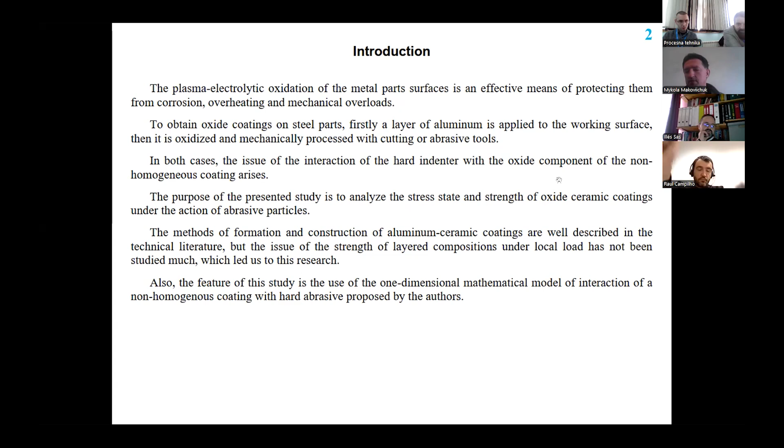So let us consider a rigid structure element foundation on which a thin coating is applied, consisting of an outer hard, functionally gradient part or layer and a relatively soft, non-homogeneous substrate, as shown in Figure 1. The mechanical contact between layers is considered ideal.

From a mechanical point of view, the hard outer layer is considered a non-uniform elastic plate, which works in tension and bending, and the soft inner layer is subject to the Winkler hypothesis of proportionality of stresses and elastic displacement.

To simulate contact with a sliding abrasive particle, the structure is loaded by a vertical force P and a horizontal friction force Fp, uniformly distributed along the z-axis deep in the drawing. In the presented model, large values of friction coefficient F correspond to sliding of fixed abrasive in the micro-cutting process, and small values of friction coefficient F correspond to sliding of unfixed abrasive with possible rolling.

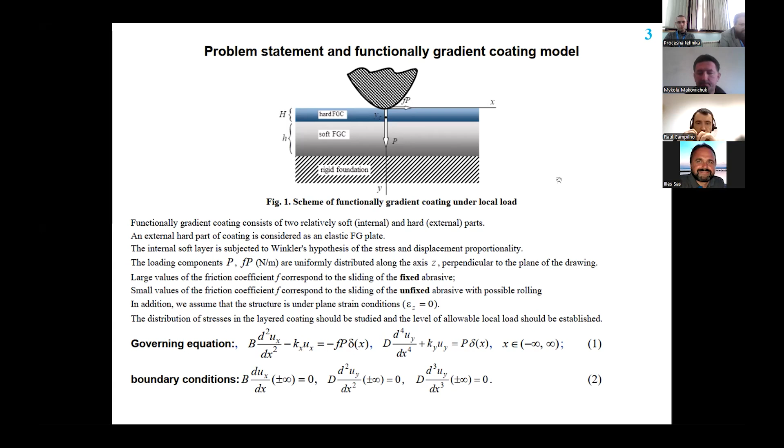We have the boundary value problem 1 and 2 that describes the unknown field of vertical displacement of the hard coating on an elastic foundation. The variable parameters contained in equations 1 and 2 are expressed by integrals, as shown on slide number 4. It's worth noting that the integrals over the coating thickness are calculated with the piecewise continuous function that contains the mechanical characteristics of the coating layers.

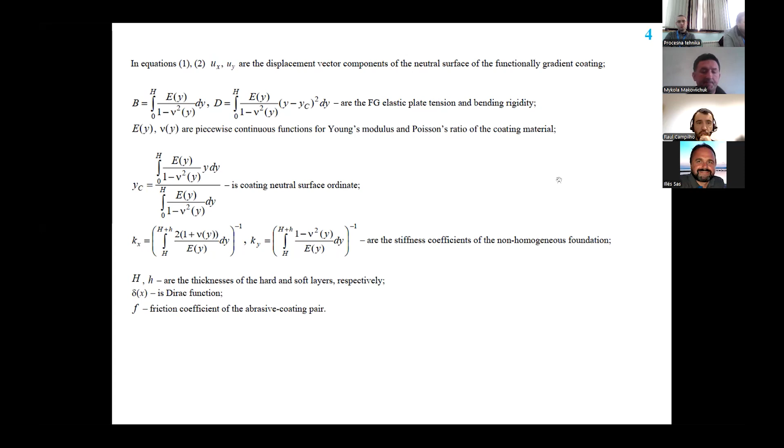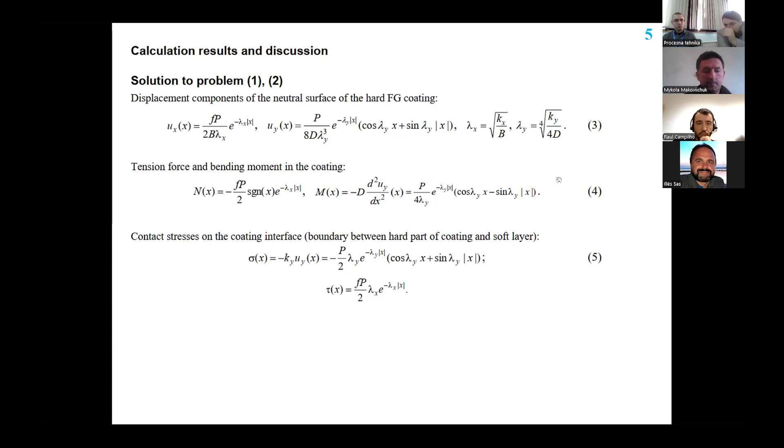After calculating the integral mechanical characteristics, the solution of problem 1 and 2 was obtained as follows: displacement of the neutral surface of the hard functional gradient coating, equation 3; tension force and bending moments in the coating, equation 4; contact stresses on the coating interface, equation 5; and the stress through the entire thickness of the functional gradient coating obtained as a piecewise function, equation 6. The strength of the coating is evaluated according to the von Mises criterion.

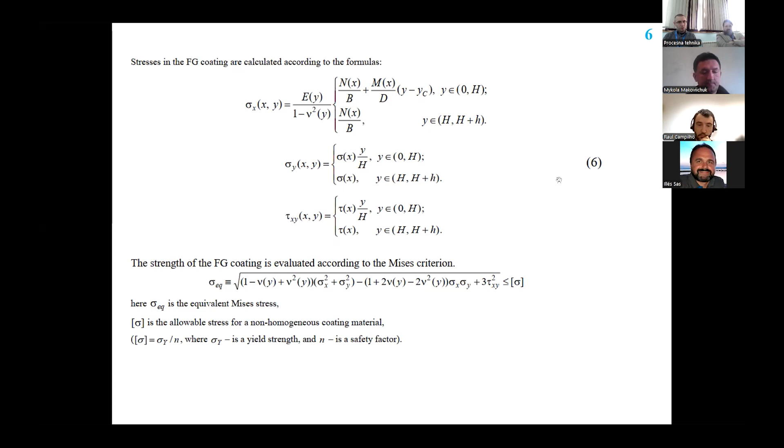So now the obtained results make it possible to determine the value of the allowable load, which depends on the mechanical and geometric characteristics. For the simulation of the behavior of functional gradient coating, we used a linear approximation for the mechanical characteristic distribution over the thickness for the hard part of the coating, and a linear and piecewise distribution for the soft substrate, because in the case of a ceramic layer obtained by plasma electrolytic oxidation of duralumin alloy, a thin annealed aluminum layer appears under the oxide layer.

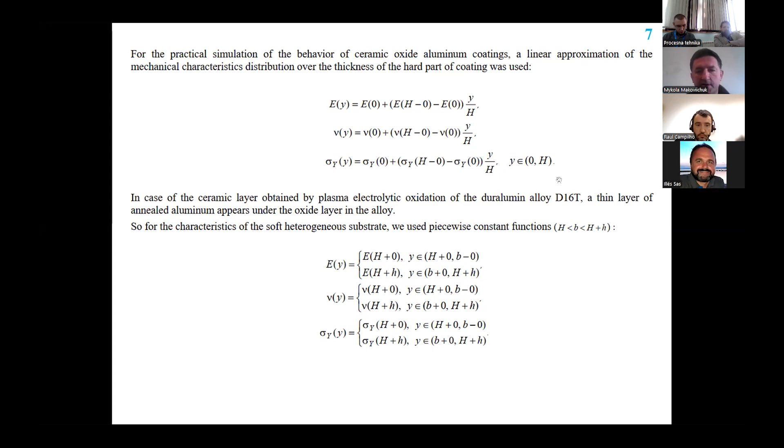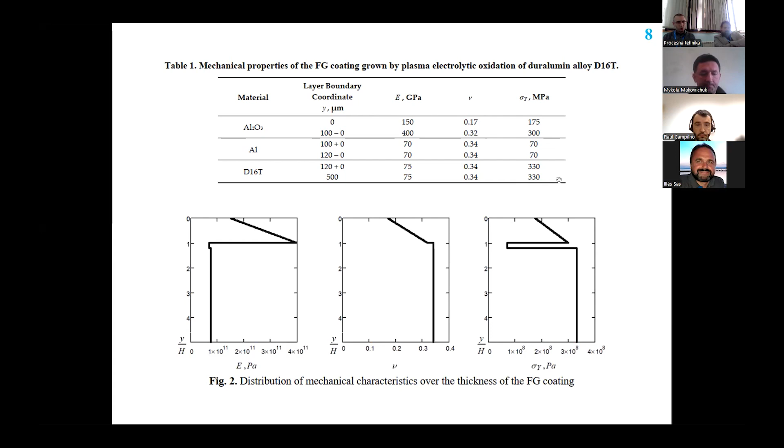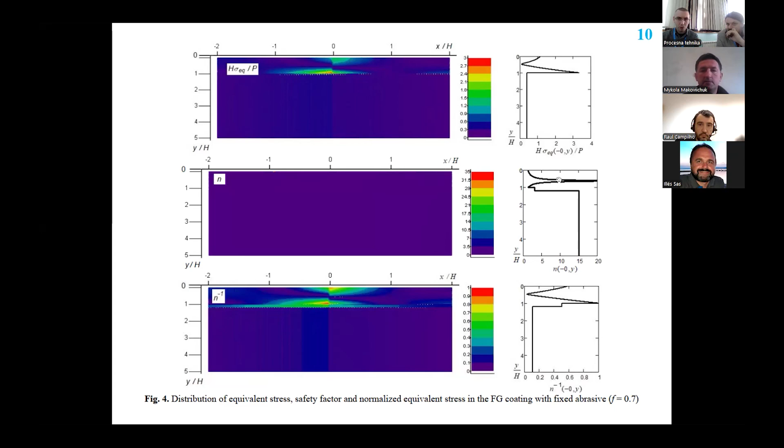So let me read the conclusions. The developed calculation technique makes it possible to investigate in analytic form the influence of mechanical and geometric characteristics of the functional gradient coating on its stress state and limit equilibrium under an arbitrarily oriented local load. Using the accepted model and an example of linear approximation of functional gradient ceramic coating on the piecewise homogeneous substrate, the interaction of the coating with fixed and unfixed abrasive was investigated.

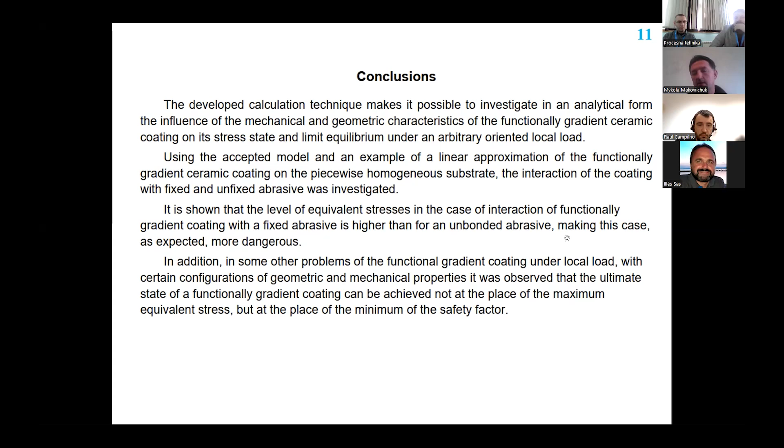It is shown that the level of equivalent stresses in the case of interaction of functional gradient coating with a fixed abrasive is higher than for unfixed abrasive, making this, as expected, more dangerous. In addition, for the functional gradient coating under local load, under certain configuration, geometry, and mechanical properties, it was observed that the ultimate state of functional gradient coating can be achieved not at the place of maximum equivalent stress, but at the place of minimum safety factor. Thank you for your attention.